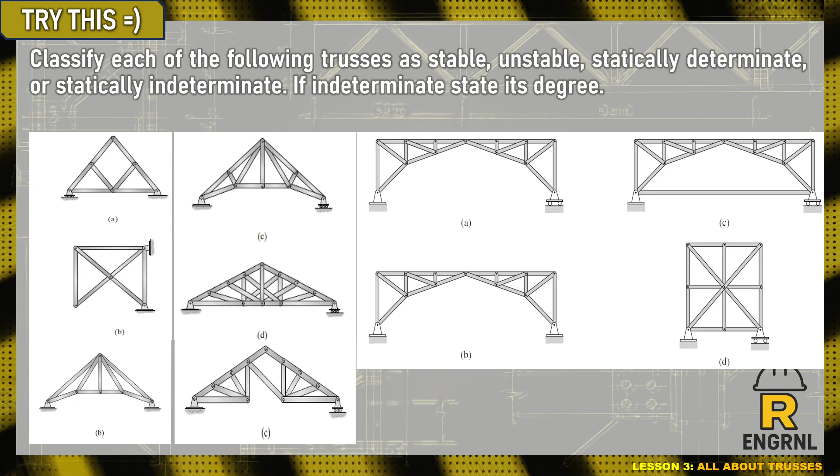So number one, we have a truss here. Let's look at this by observation - whether it follows our rule that all members should form a triangle, the basic simple truss. And when we have a quadrilateral formed by members, that's unstable. So let's try to observe.

We can see internally, if we remove the support here, it also has a geometrical error. Because this would rotate. So it should have had a horizontal member here, in order to form a triangle.

Even if we compute it, M is 8, J is 6, R is 3. R means reaction, J means joints, M means member. So by the formula for internal stability, it's not satisfied - 8 is less than 9. So it's internally unstable by computation, and by observation due to its geometric arrangement, it's also unstable.

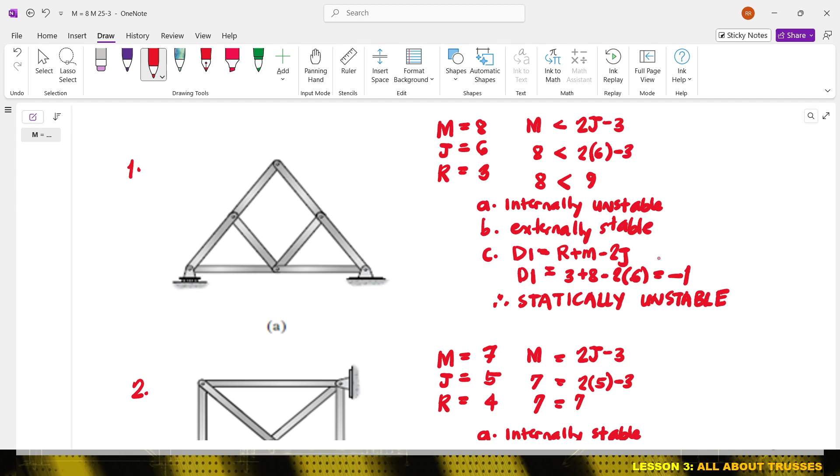Number 2. By observation, this one is stable. Because if you remove the support, unlike number 1, it will remain in its position. So one of our markers is that all members should form a triangle - the adjacent members are forming triangles.

So, or simple case - by computation, let's get M, J, and R: 7, 5, and 4. Substituting, it satisfies M equals 2J minus 3. Therefore, this is internally stable by computation and at the same time by its arrangement. And also, it is externally stable.

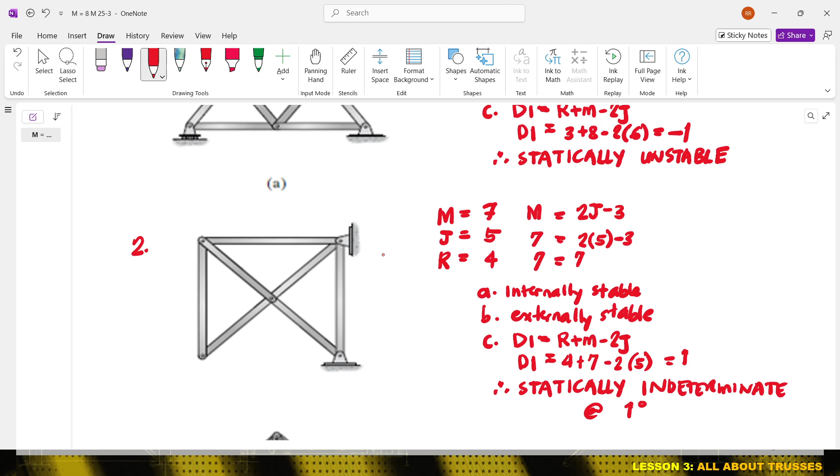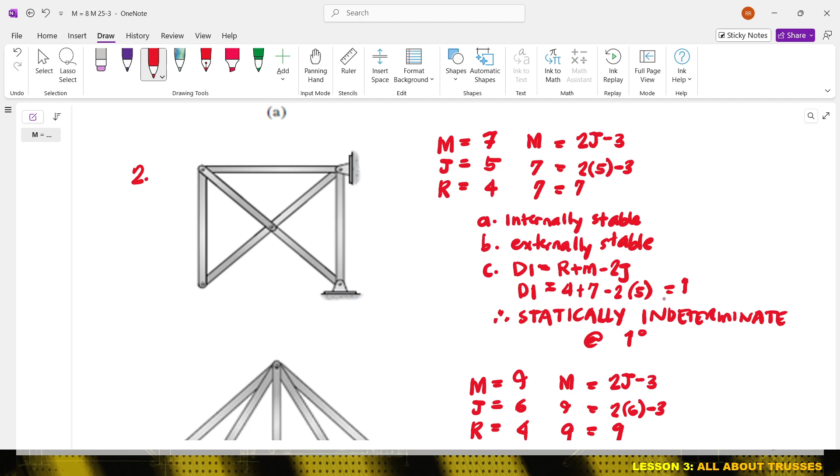Number 3. By observation, first, just remove the support. Will it remain rigid? Will anything rotate, or will any member move? It's stable, because everything forms a simple truss.

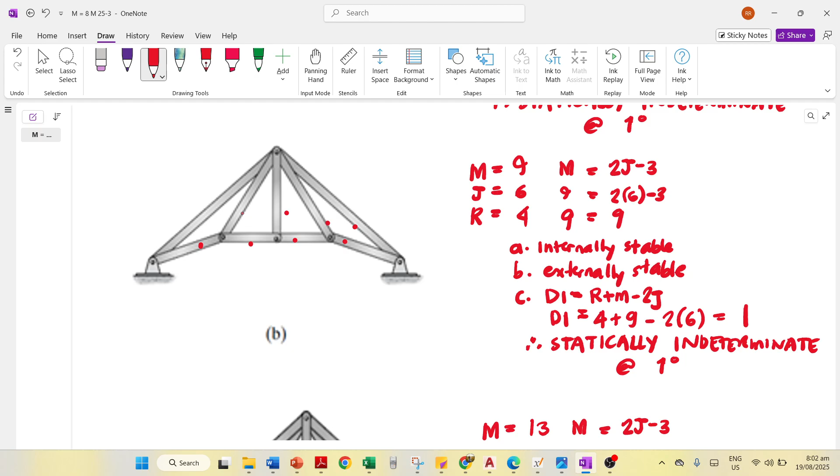Okay, is that right? 1, 2, 3, 4, 5, 6, 7, 8, 9. So here, two were added. So it should be 12... let me recount: 1, 2, 3, 4, 5, 6, 7, 8, 9, 10, 11, 12, 13.

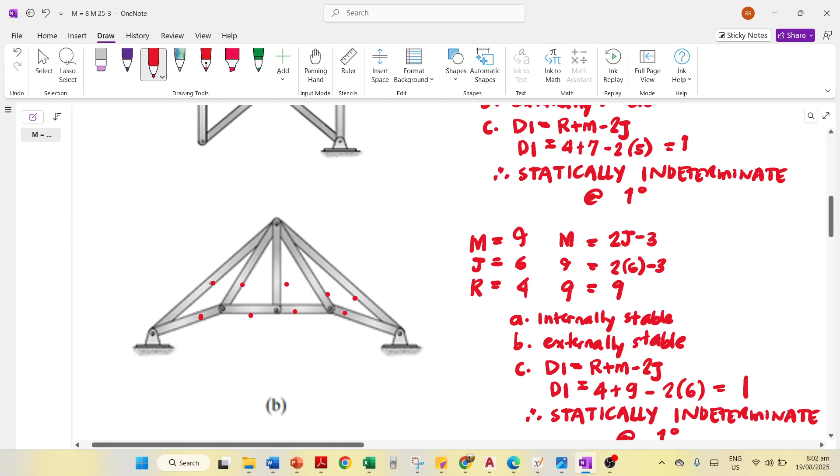It was added since this member became doubled, and we gained a joint. So it's 13 members, joints is 8, R is 3. By computation, it satisfies the equation - 13 equals 13, meaning it's internally stable.

By observation, internally it's also stable, following the arrangement. Externally, it's also stable - obviously. So DI is 3 plus 13 minus 2 times 8, which is 16. So we have 16 minus 16 - it's determinate.